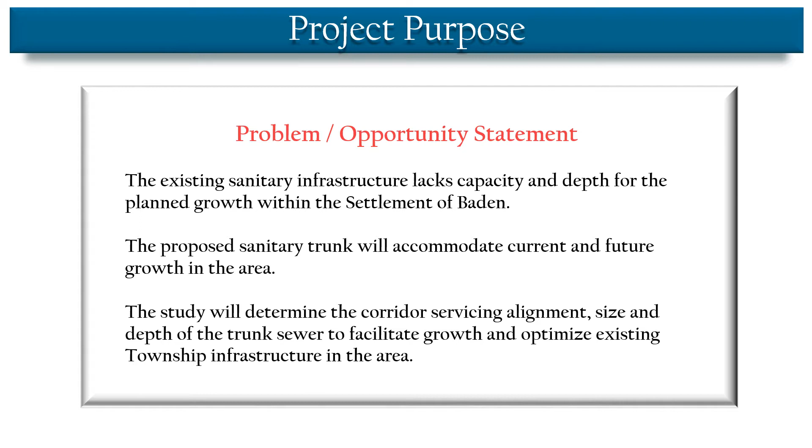Providing sewage collection to accommodate existing and future growth of Baden will require changes to the current sewage collection system. Under the Municipal Class EA process, establishing, extending, or enlarging a sewage collection system is considered a Schedule B project as defined in the Municipal Engineers Association Class EA document.

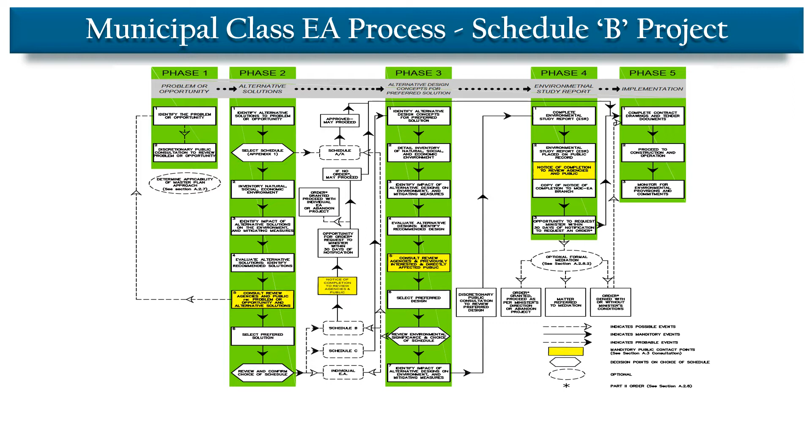As a Schedule B project, the project planning proceeds under the planning and documentation procedures of Phase 1 and Phase 2 of the Municipal Class Environmental Assessment process. Through this process, feasible solutions are identified and evaluated with input from agencies, Indigenous communities, and stakeholders toward a recommendation for a preferred solution. At the conclusion of Phase 2, the appropriate EA planning schedule is confirmed, and if no Part 2 order requests are received by the Minister, the proponent may proceed to design and implement the project.

An overview of the EA process is illustrated on the flowchart. The study is currently at the stage where we engage with interested parties and the public about the project and the alternative solutions, as highlighted in the yellow box under Phase 2. We are currently midway through Phase 2 of the study.

Following the confirmation of the preferred solution, a project file report will be prepared to summarize the decision-making process for the public and stakeholders. Once Township Council has endorsed the preferred alternative, a 30-day review period will be provided for the public and stakeholders to review and comment on the report.

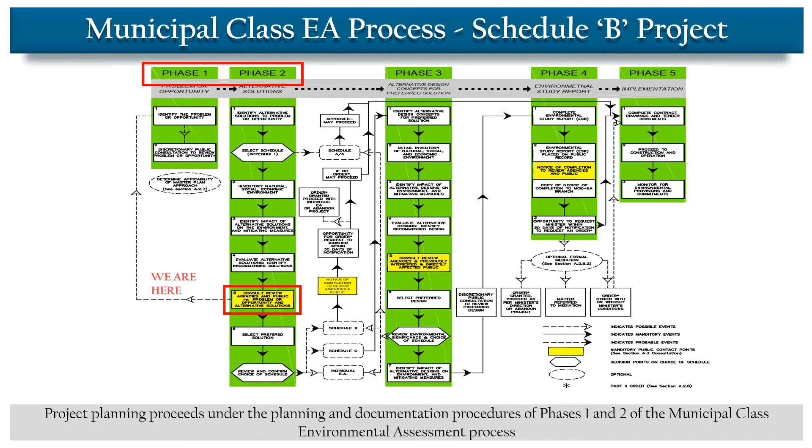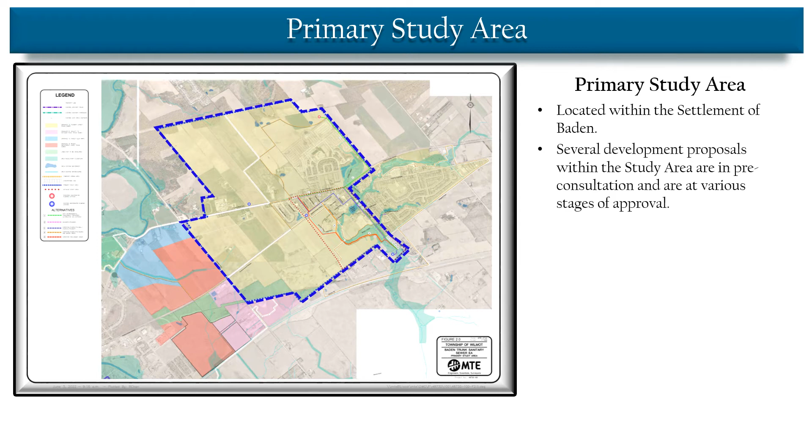The primary study area is located within the settlement of Baden and consists primarily of agricultural and residential land uses, with some commercial and institutional land uses as well. Several development proposals within the study area are in pre-consultation and are at various stages of approval. Key considerations include future development per the Township's official plan, topography, capacity of existing sewer, encroachment on natural features, and planning policy and regulation. The Township, in conjunction with the region, will ensure that all new development is serviced by adequate and effective water, wastewater, and stormwater facilities.

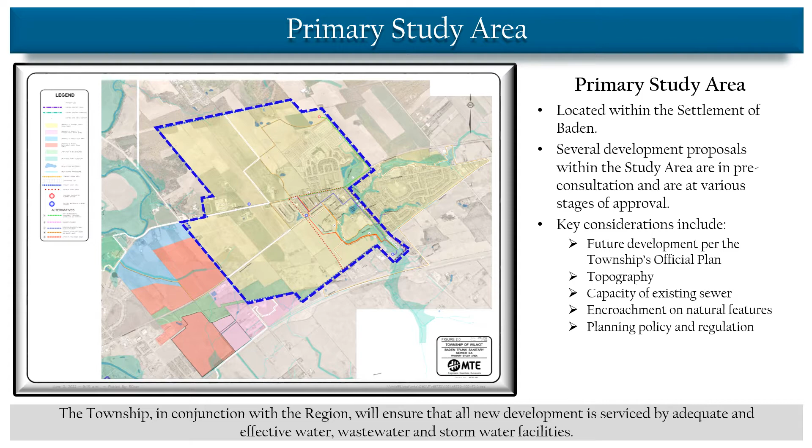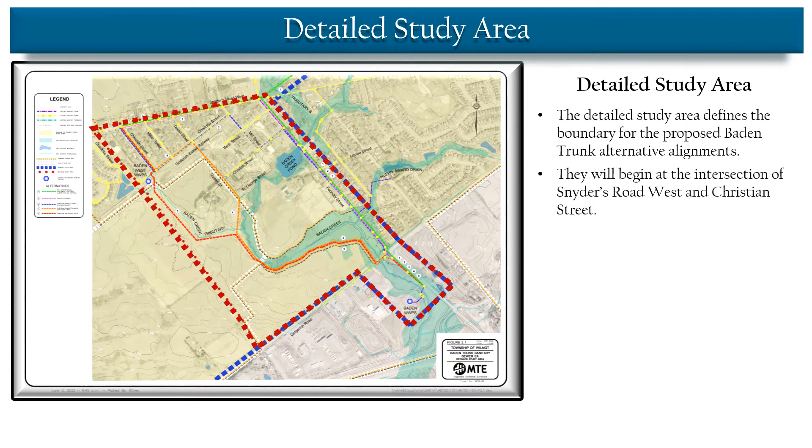The detailed study area defines the boundary for the proposed Baden Trunk alternative alignments. It is defined as the area south of Snyder's Road West, west of Foundry Street to the Baden Wastewater Pump Station, north of Gingrich Road, and east of Christian Street, including the agricultural lands it crosses. All alternative alignments will begin at the intersection of Snyder's Road West and Christian Street, and ultimately connect to the Baden Wastewater Pumping Station.

There are 4 prominent water features, existing archaeological find spots, and sensitive vegetation communities within the detailed study area.

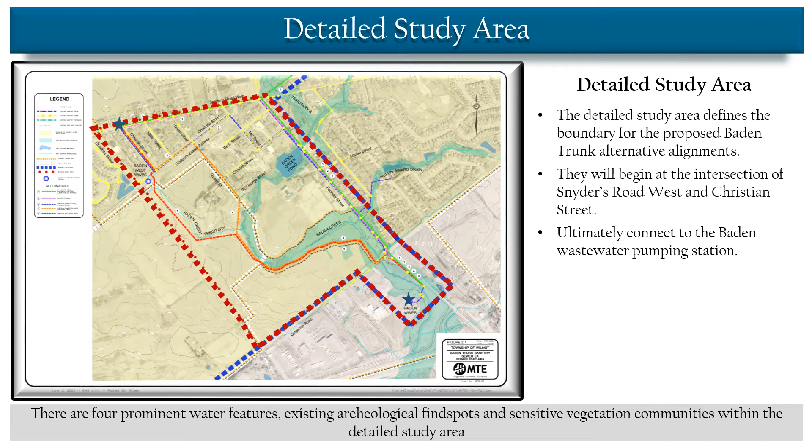The Baden wastewater pumping station and associated sewer system are under capacity for peak flows and does not support the future growth demands of Baden.

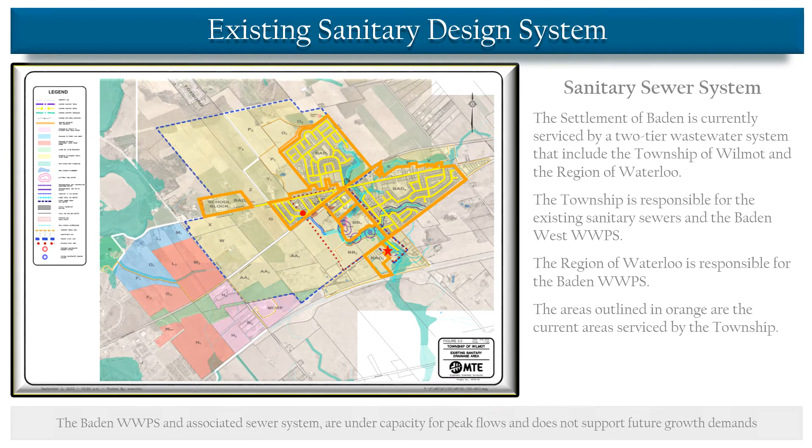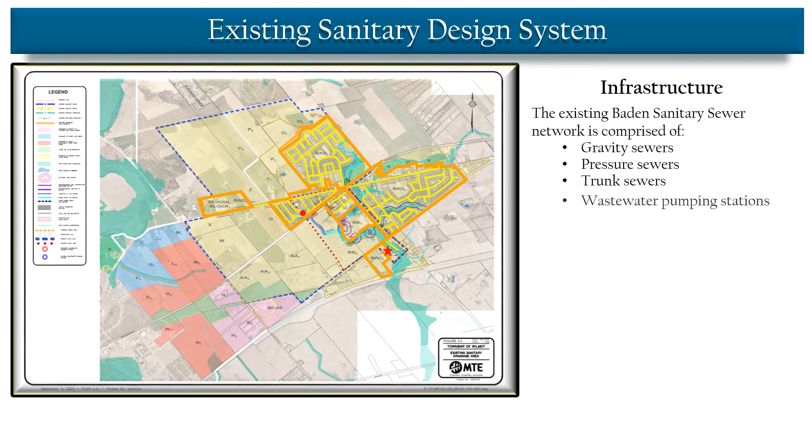The existing Baden Sanitary Sewer Network is comprised of gravity sewers, pressure sewers, trunk sewers, and wastewater pumping stations. Pressure sewers and local gravity sewers connect with the existing sanitary trunk sewers along Foundry Street, where it flows southeast to the Baden wastewater pumping station and ultimately to the New Hamburg wastewater treatment plant. Based on the elevations and locations of existing infrastructure, extended sanitary service to the primary study area would not be achievable by gravity.

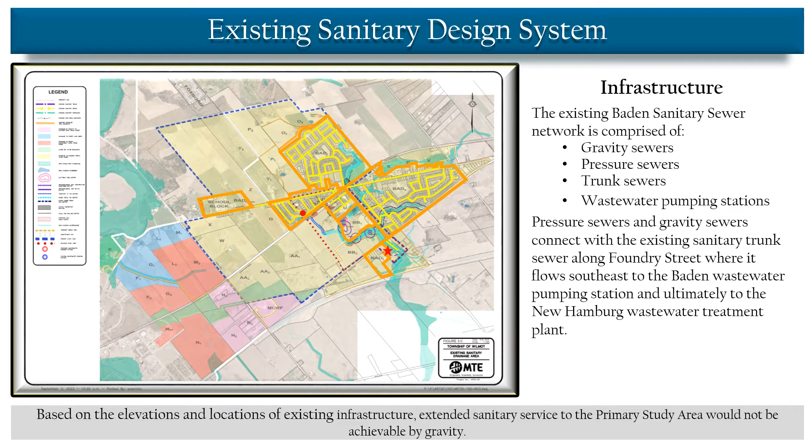An assessment of the natural environment was completed to characterize the vegetation communities and the potential for habitat of species at risk. Vegetation communities within the detailed study area and along Alternative 1 were inventoried to assess potential direct and/or indirect impacts to significant and sensitive vegetation species, as well as terrestrial habitat features and functions.

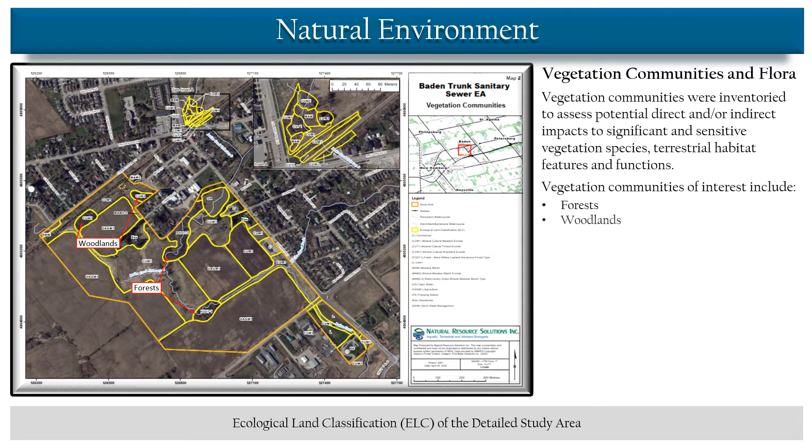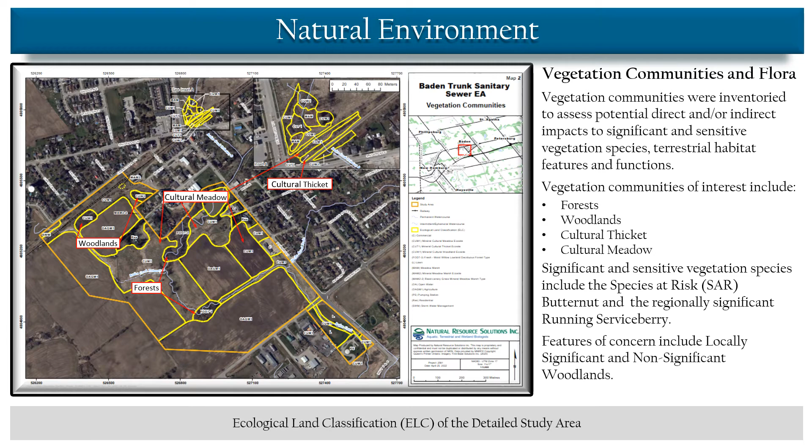Although the vegetation communities within the detailed study area are considered relatively common in Ontario, there are vegetation communities of interest, including forests, woodlands, cultural thicket, and cultural meadow. The significant and sensitive vegetation species identified include the species at risk butternut tree and the regionally significant running serviceberry. Features of concern include locally significant woodlands and non-significant woodlands.

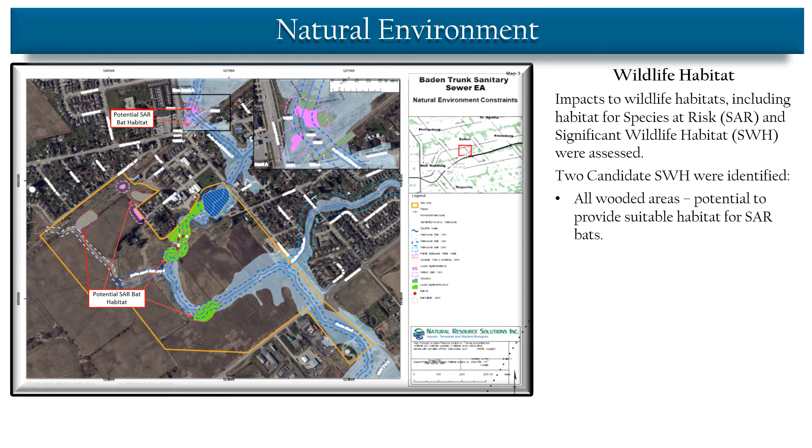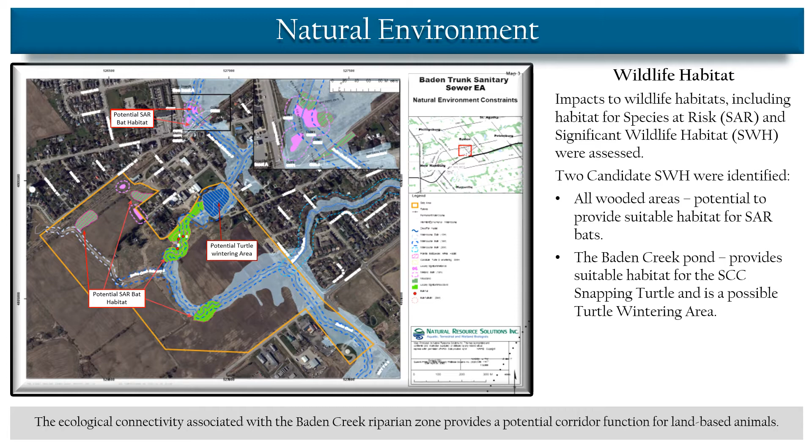Impacts to wildlife habitats, including habitat for species at risk and significant wildlife habitat, were assessed. Two candidate significant wildlife habitats were identified: all wooded areas, which have the potential to provide suitable habitat for species at risk bats, and Baden Creek Pond, which provides suitable habitat for the species of conservation concern snapping turtle and is a possible turtle wintering area. The ecological connectivity associated with the Baden Creek riparian zone provides a potential corridor function for land-based animals.

Wetland cover within the study area is limited to small, isolated features that are anthropogenic in nature. Several locally significant wetlands were identified within the detailed study area and along Alternative 1. Though not provincially significant, the locally significant wetlands are considered to be a form of supporting environmental feature.

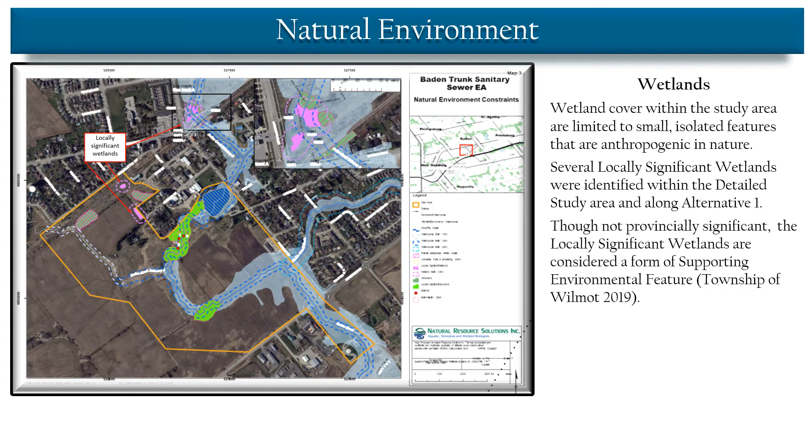There are five main water features within the primary study area. They include Baden Creek, a permanent water course with groundwater inflow; Baden Creek Tributary A, an ephemeral intermittent stream; Baden Creek Tributary B, a permanent water course with groundwater inflow; the Huehn Award Drain, a cold water stream; and Baden Creek Pond.

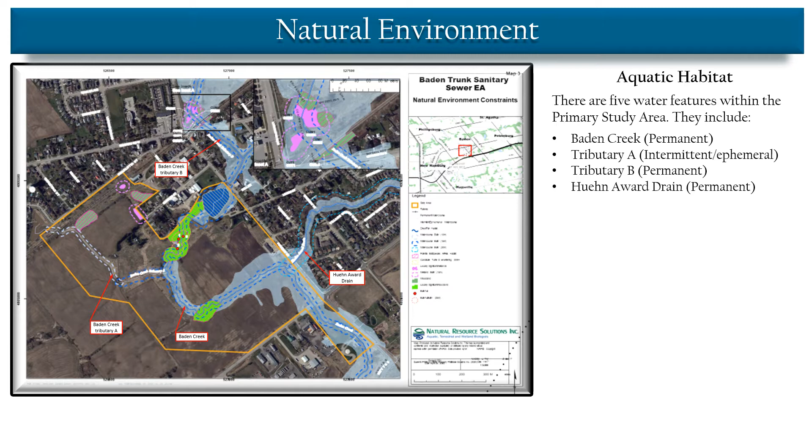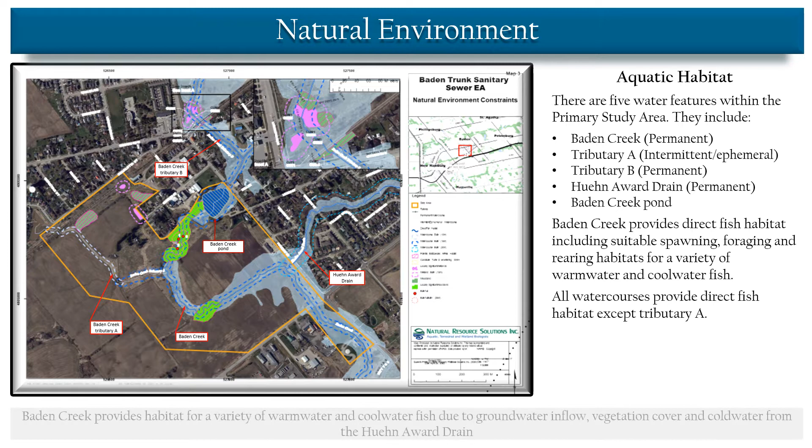Baden Creek provides direct fish habitat, including suitable spawning, foraging, and rearing habitats for a variety of warm water and cool water fish. All watercourses provide direct fish habitat except Tributary A. Baden Creek provides habitat for a variety of warm water and cool water fish due to groundwater inflow, vegetation cover, and the Huehn Award Drain.

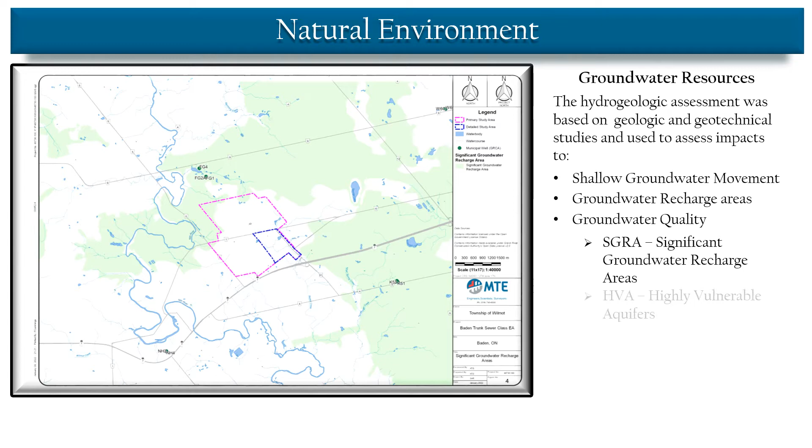The hydrogeologic assessment, based on geologic and geotechnical information, was used to assess impacts to shallow groundwater movement, groundwater recharge areas, and groundwater quality by means of significant groundwater recharge areas, highly vulnerable aquifers, wellhead protection areas, and intake protection zones. No significant impacts to groundwater resources were revealed.

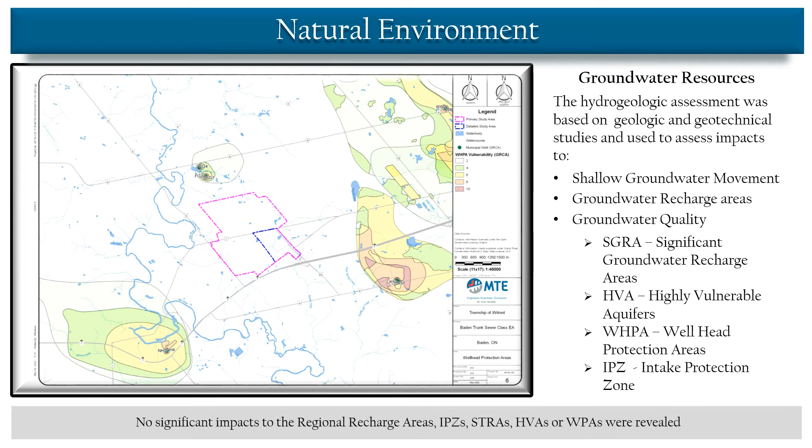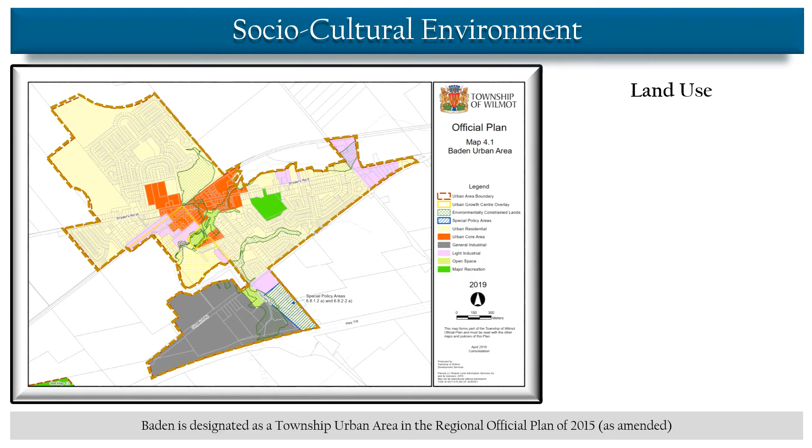Baden is designated as a township urban area according to the Regional Official Plan of 2015. Land use designations within Baden consist of environmentally constrained lands, special policy areas, urban residential, urban core, open space, major recreational, light industrial with general industrial lands to the south, and agricultural lands, which are primarily located outside the urban area within the countryside. Each alternative was assessed for potential land use impacts.

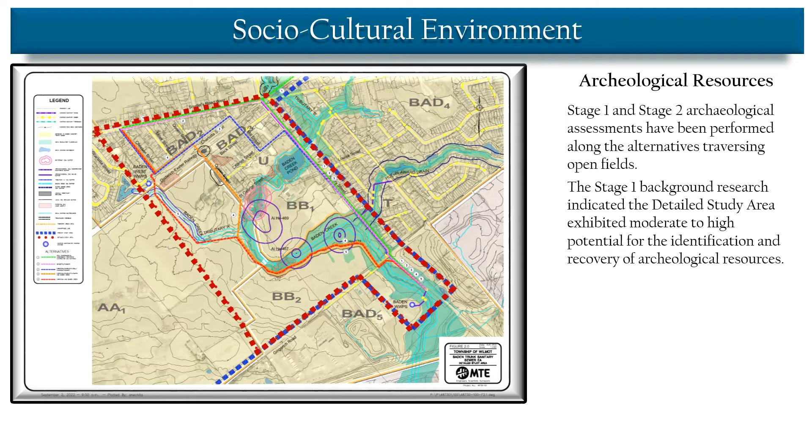Stage 1 and Stage 2 archaeological assessments have been performed along the alternatives traversing open fields. The Stage 1 background research indicated the detailed study area exhibited moderate to high potential for the identification and recovery of archaeological resources. Stage 2 investigations consisted of pedestrian surveys at 3-meter intervals and test pits. Archaeological finds require a 20-meter protective buffer and a 50-meter monitoring buffer during construction.

Baden has been identified as a potential cultural heritage landscape. As such, a cultural heritage assessment of the primary study area was performed. Of the 11 cultural heritage resources identified within or adjacent to the detailed study area, 7 were listed heritage properties and 4 were designated heritage properties.

In addition, Foundry Street and Snyder's Road West have been identified as scenic roads and have been included in the assessment. Adverse impacts were evaluated as designated in the Ontario Heritage Toolkit. All cultural heritage resources identified are included in the Township's Cultural Heritage Register.

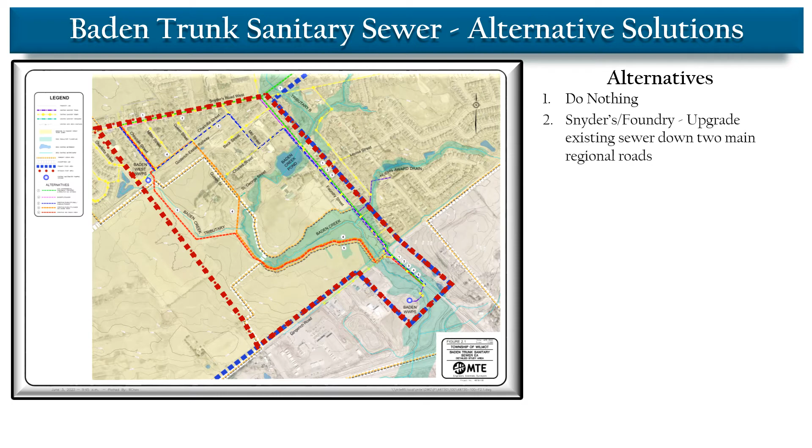Five alternative alignments were selected for this study. They consist of Alternative 1, the Do Nothing, which is the 2014 pre-approved alignment; Alternative 2, which requires upgrading the existing sewers down 2 main regional roads; Alternative 3, requiring upgrading existing sewers along local and regional roads; Alternative 4, requiring upgrading local sewers and installing new sewers within agricultural lands; and Alternative 5, which requires upgrading a local sewer and installing new sewers within agricultural lands.

The alternatives were evaluated relative to each other against a set of criteria to meet the project objectives outlined in the Problem Opportunity Statement.

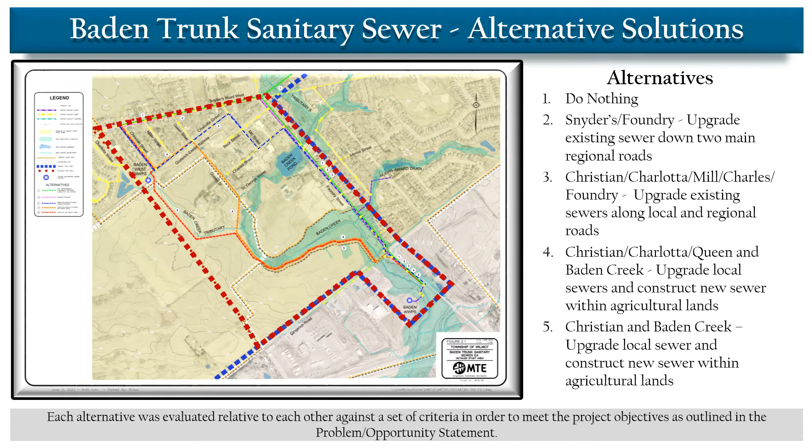Alternative 1 is the Do Nothing alternative.

The eastern portion of the alignment begins at the proposed wastewater pumping station, runs southeast along the eastern boundary of the primary study area, then southwest along the railway to Foundry Street. The western portion begins at the intersection of Christian Street and Snyder's Road West, proceeds east to Foundry Street, where it connects with the eastern portion, then southeast to the Baden wastewater pumping station.

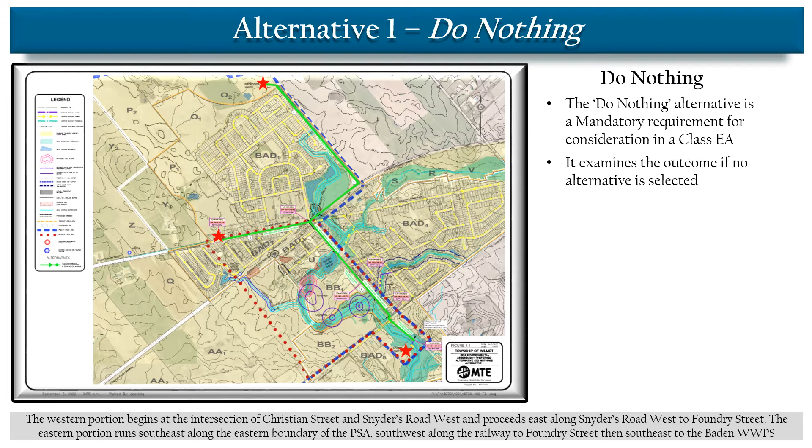The Do Nothing alternative is a mandatory requirement for consideration in a Class EA. It examines what may happen if no alternative is selected. In this case, the approved wastewater servicing strategy of 2014 will be carried out.

Aside from this alternative being the pre-approved sanitary servicing strategy, the benefits of this alignment are that it does not impact the significant wildlife habitat woodlands or the species at risk butternut trees. It also does not impact any known archaeological find spots.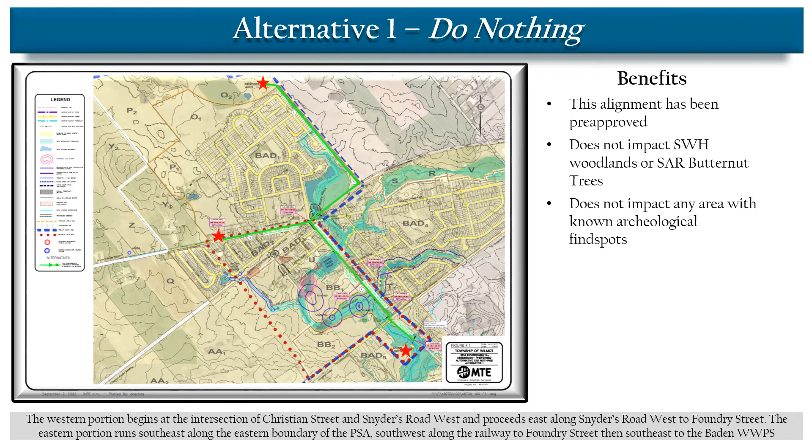The constraints of this alternative are that it does not support the planned future development of Baden. It hinders timely project completion due to regional road corridors. It greatly disrupts the road network and traffic along Snyder's Road West and Foundry Street, impacting access to existing businesses and residents, as well as the township fire hall.

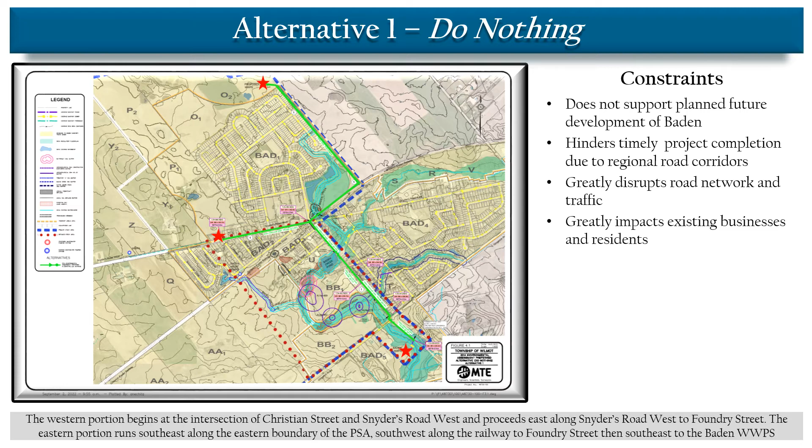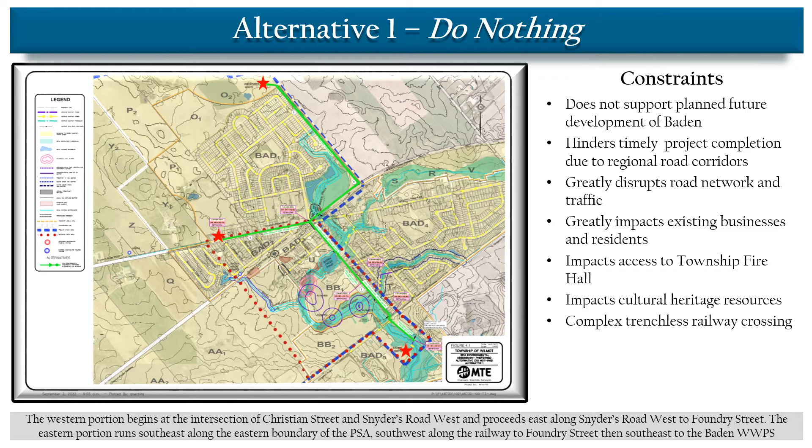It impacts the largest number of cultural heritage resources during construction. The installation of the trenchless sewer pipes under the railway will be technically complex due to the narrow right-of-way and the various connections at the busy intersection of Snyder's Road West and Foundry Street.

The impacts to flow regime at the stream crossings will lead to water quality and water quantity issues affecting the aquatic habitat of Baden Creek, the Baden Creek Pond, and the Huehn Award Drain.

The additional pumping station required for this alternative will increase noise and odor, as well as long-term operation and maintenance costs. The right-of-way to service the eastern portion of the alignment has not been secured and is currently the most costly alternative.

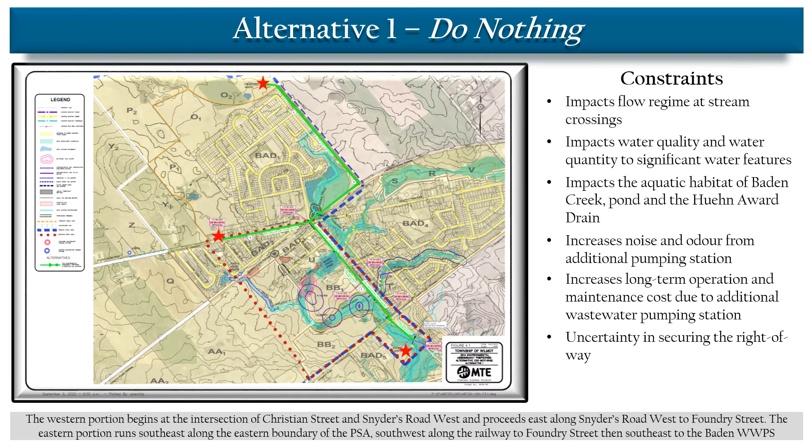Alternative 2 begins at the intersection of Snyder's Road West and Christian Street, proceeds east on Snyder's Road West to Foundry Street, where it continues southeast to the Baden wastewater pumping station.

This alternative has negligible impacts to vegetation communities, wildlife habitat, and wetlands. It does not impact any known archaeological find spots. It eliminates the school wastewater pumping station, which reduces the noise, odor, and long-term operation and maintenance costs associated with the pumping station. No land acquisitions are required for this alternative.

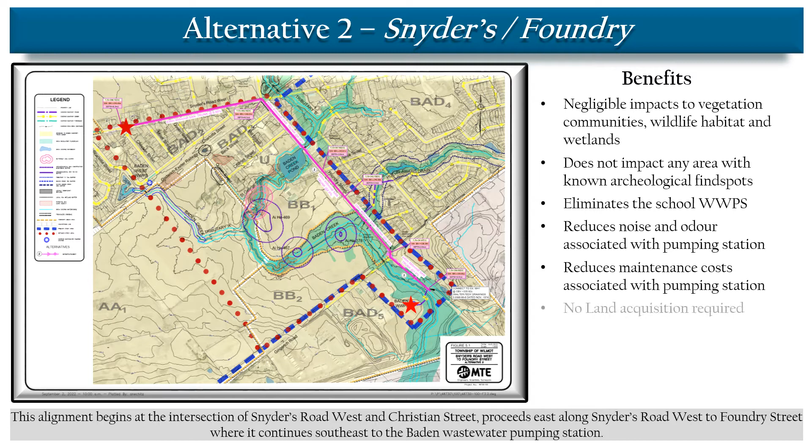The constraints of this alternative are that it does not completely support the planned future development of Baden and hinders timely project completion due to the regional road corridors. It greatly disrupts the road network and traffic along Snyder's Road West and Foundry Street, impacting access to the existing businesses and residents, as well as the Township Fire Hall.

It will impact a large number of cultural heritage resources during construction. Impacts to flow regime at the stream crossing will lead to water quality and water quantity issues, which will affect the aquatic habitat of Baden Creek, the Baden Creek Pond, and the Huehn Award Drain.

Installation of the trenchless sewer pipes under the railway will be technically complex due to the deep sewer, the narrow railway right-of-way, and the various connections at the busy intersection of Snyder's Road West and Foundry Street.

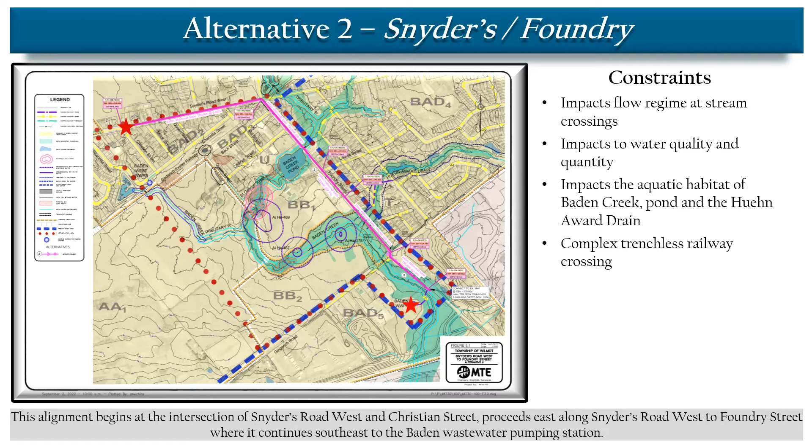Alternative 3 begins at the intersection of Snyder's Road West and Christian Street, proceeds southeast to Charlotta Street, northeast to Mill Street, southeast to Charles Street, northeast to Foundry Street, then southeast to the Baden wastewater pump station.

This alternative has negligible impacts to vegetation communities, wildlife habitat, and wetlands. It does not impact any known archaeological find spots. It eliminates 2 wastewater pumping stations, the school wastewater pumping station and the Baden West wastewater pumping station, which will reduce noise, odor, and long-term operation and maintenance costs associated with the pumping station and the Baden West noise wall. No land acquisitions are required for this alternative.

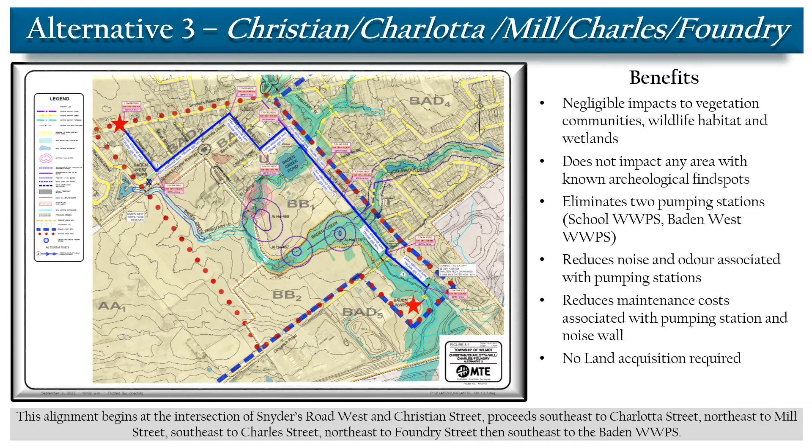The constraints of this alternative are that it does not completely support the planned future development of Baden and hinders timely project completion due to regional road corridors. It greatly disrupts the road network and traffic along local roads and Foundry Street, impacting access to the existing businesses and residences, as well as the Township Fire Hall.

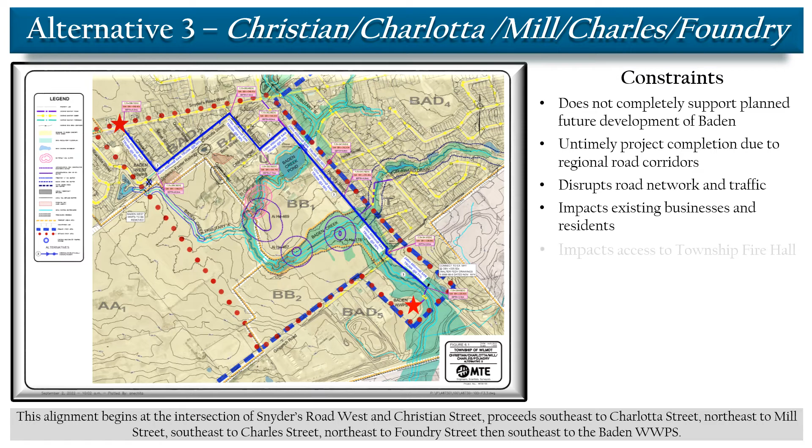Various cultural heritage resources are also impacted. Impacts to flow regime at the stream crossings will lead to water quality and water quantity issues, which will affect the aquatic habitat of Baden Creek, the Baden Creek Pond, and the Huehn Award Drain.

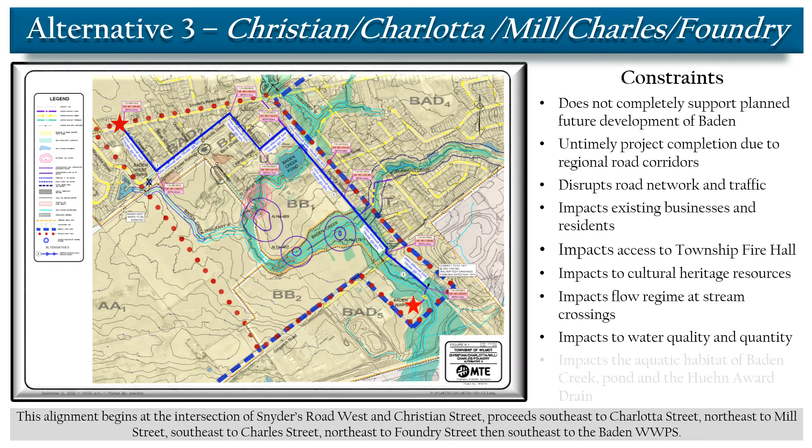Alternative 4 begins at the intersection of Snyder's Road West and Christian Street. It proceeds southeast to Charlotta Street, northeast to Queen Street, southeast on Queen Street, along Baden Creek to Gingerich Road, northeast to Foundry Street, and southeast to the Baden wastewater pumping station.

This alternative provides flexibility for servicing the entire primary study area and allows for timely project completion due to minimal regional road corridors. It eliminates 2 wastewater pumping stations, the school wastewater pumping station and the Baden West wastewater pumping station.

This will reduce noise, odor, and long-term operation and maintenance costs associated with the pumping station and the Baden West noise wall.

There are minimal impacts to Baden Creek, the Baden Creek Pond, and the Huehn Award Drain. It does not impact flow regime due to trenchless stream crossings or to the aquatic habitat of any feature.

There are minimal impacts to cultural heritage resources, and the right-of-ways for this alignment have been secured.

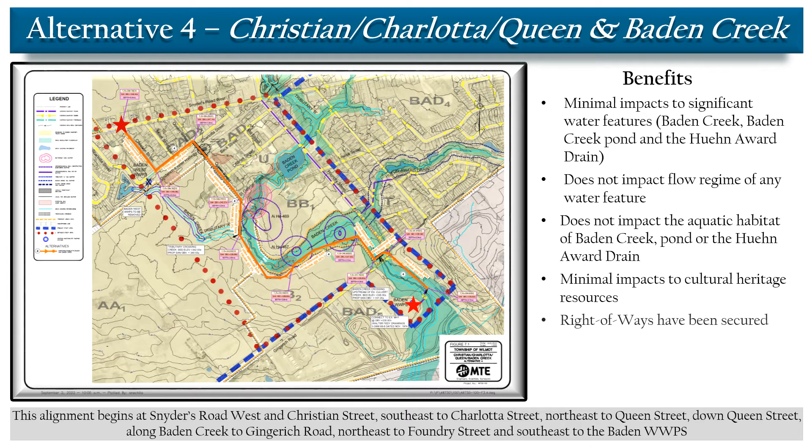The constraints of this alternative are that it disrupts the local road network and traffic along Christian Street, Charlotta Street, and Queen Street, impacting access to the existing local residents.

It also infringes on the 50-meter monitoring buffer for 2 archaeological find spots and may impact the locally significant wetlands at the Trenchless Railway crossing.

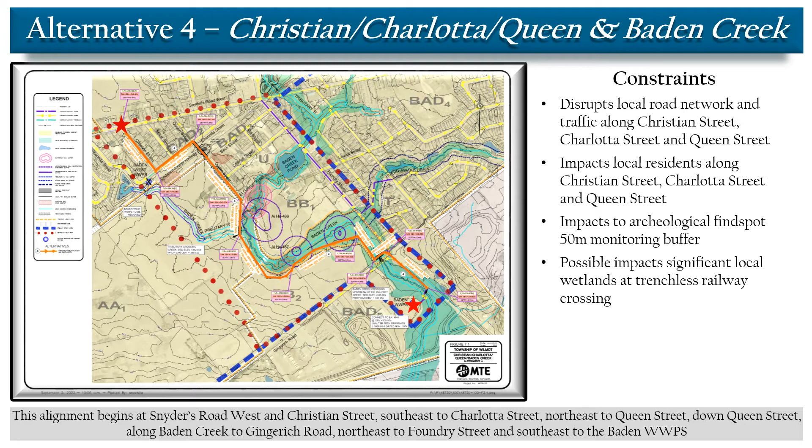Alternative 5 begins at the intersection of Snyder's Road West and Christian Street, proceeds southeast to Charlotta Street, crosses the railway, and runs adjacent to the Baden Creek Tributary A and Baden Creek to Gingerich Road, northeast to Foundry Street, and southeast to the Baden Wastewater Pumping Station.

This alternative provides flexibility for servicing the entire primary study area and allows for timely project completion due to minimal regional road corridors. There are minimal disruptions to the road network and traffic.

It impacts access to existing businesses and residents the least. There are no impacts to cultural heritage resources. It eliminates 2 wastewater pumping stations, the school wastewater pumping station and the Baden West wastewater pumping station, which will reduce noise, odor, and long-term operation and maintenance costs associated with the pumping station and the Baden West noise wall.

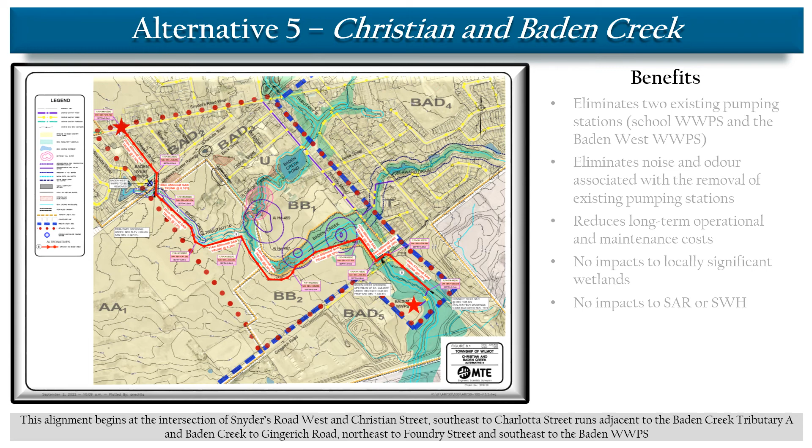This alternative does not impact any locally significant wetlands, species at risk, or significant wildlife habitat. There are negligible impacts to Baden Creek, the Baden Creek Pond, and the Huehn Award Drain.

It does not impact flow regime due to trenchless stream crossings or aquatic habitat of any water feature. The right-of-ways for this alignment have been secured and represents the least cost solution.

The constraints of this alternative is that it disrupts local traffic along Christian Street and a small section of Charlotta Street, which impacts access to existing local residents.

It will also require archaeological monitoring within the 50-meter archaeological buffer during construction.

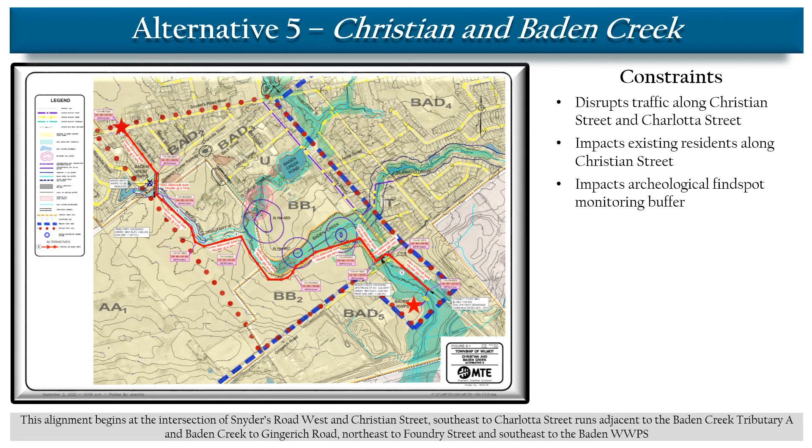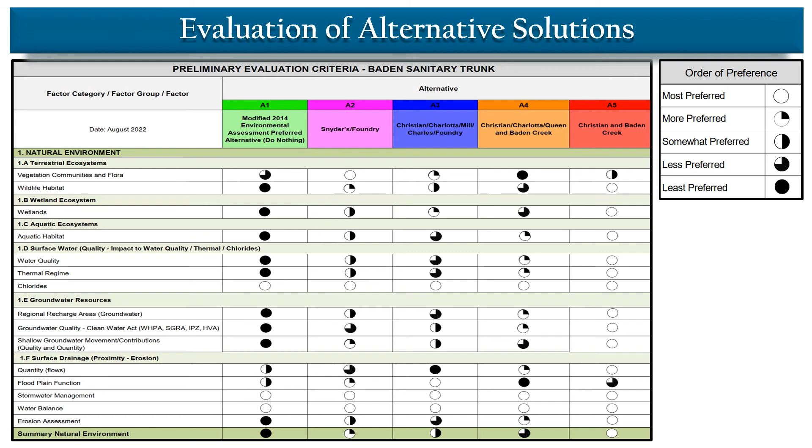The impacts of the alternatives were evaluated against the inventory of the natural, social, cultural, economic, and technical environment, including possible mitigating measures.

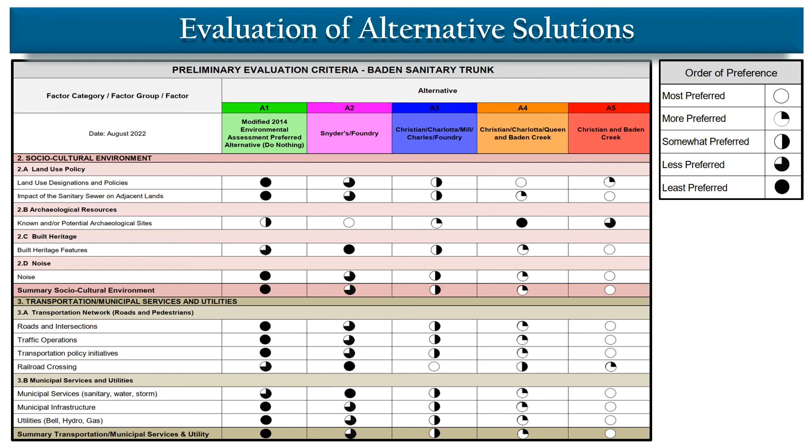Each alternative underwent a numerical evaluation. The alternatives were then compared to each other by applying a ranking from the most preferred to least preferred based on the level of anticipated impact for each.

A graphical representation of the numerical evaluation is shown to best illustrate the results of the analysis. A full pie represents the greatest anticipated impact and therefore the least preferred. The empty pie represents the least anticipated impact and therefore the most preferred.

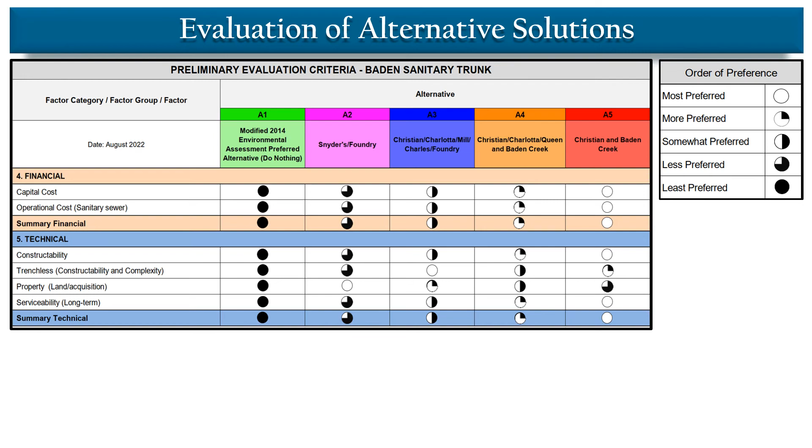The table provides a summary of the evaluation of alternatives as an average ranking under each environment category. The outcome of the evaluation illustrates that Alternative 5 received the most favorable overall ranking when compared to the other alternatives.

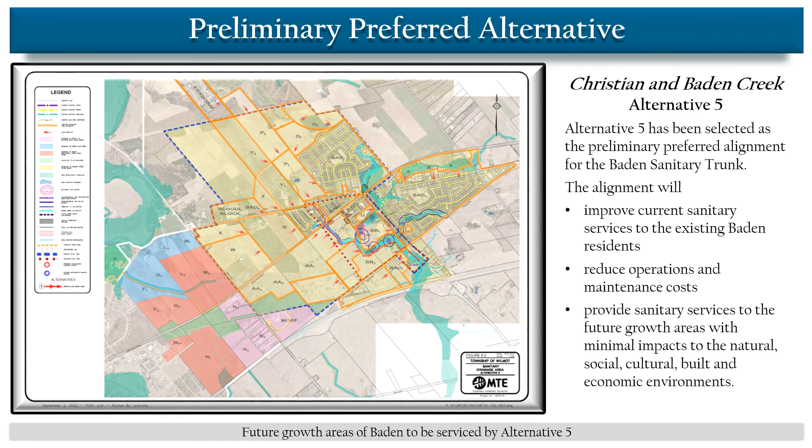Alternative 5 has been selected as the preliminary preferred alignment for the Baden Sanitary Trunk. The alignment will improve current sanitary services to the existing Baden residents, reduce operations and maintenance costs, and provide sanitary services to the future growth areas with minimal impacts to the natural, social, cultural, built, and economic environments.

This alternative consists of replacing the local sanitary sewer along Christian Street, installing a new trunk sanitary sewer along Christian Street through the open fields adjacent to the Baden Creek Tributary A and Baden Creek.

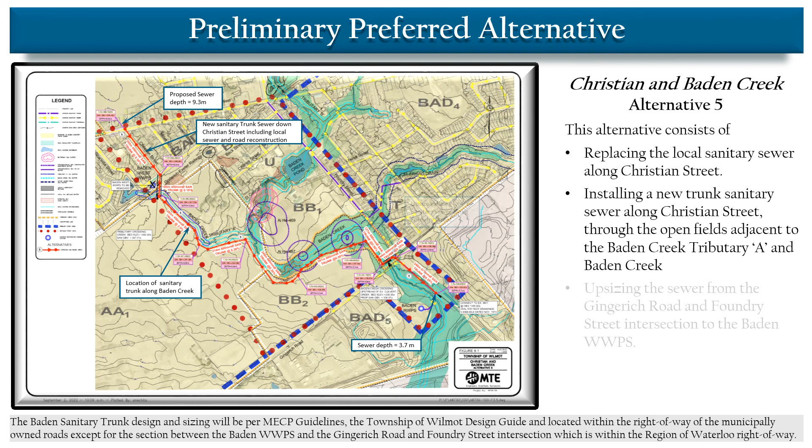And upsizing the sewer from the intersection of Gingerich Road and Foundry Street to the Baden Wastewater Pumping Station. A complete reconstruction of Christian Street will be required.

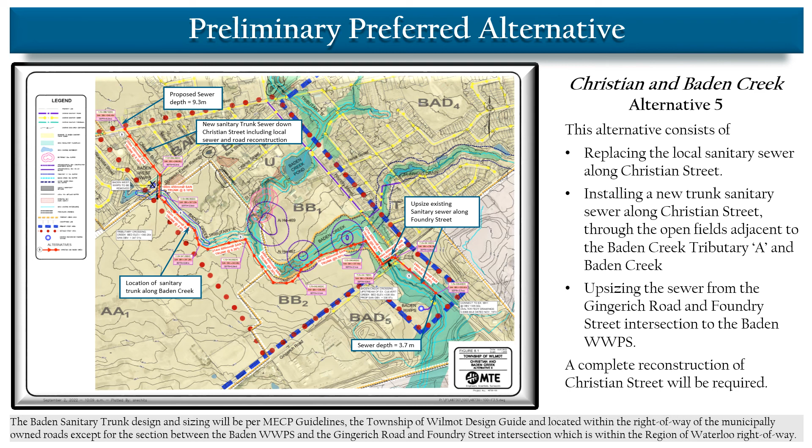The Municipal Class EA process, including the input from the public, agencies, Indigenous communities, and stakeholders, will be documented in a project file report. Once council endorsement is received, the project file report will be made available for public review.

And comment for a period of 30 days following the notice of completion. At this time, it is anticipated that the notice of completion and the project file report will be available in the winter of 2022.